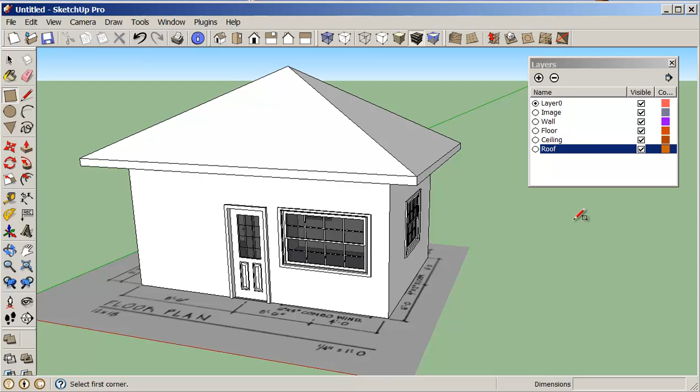This is the third class with bringing a JPEG image into SketchUp and creating your model. I'm going to turn off my image layer. We've actually finished that part of it. Now what I'm doing is I want to do a crown molding around the ceiling.

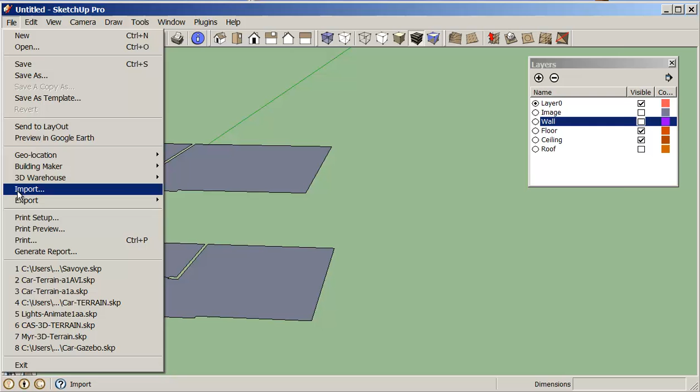So I'm going to do some ceiling effects here. I'm going to turn my roof off, and turn my walls off so that all I have left is my floor and my ceiling. So what I want to do here is import, file, import, and I can do crown molding.

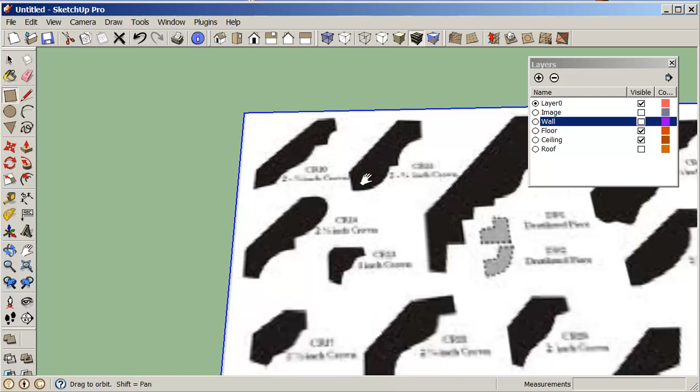I'm just going to bring in this crown molding and stick this here. Of course it's not going to be the right size. I'm not too concerned about it, I'll fix it up later. So let's say I pick this first one here and do a rectangle from here to here.

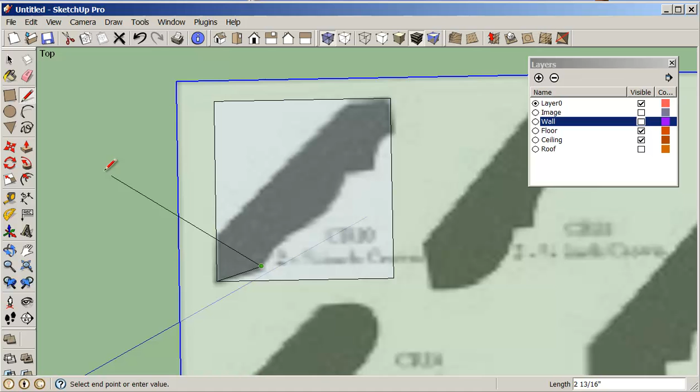Go into X-ray mode so I can see what I'm doing. I'm not going to worry about that part. Just going to draw a line from here to here, then an arc from here to here, and from here to here. Then a line. Oops, I missed that arc. Back to arc.

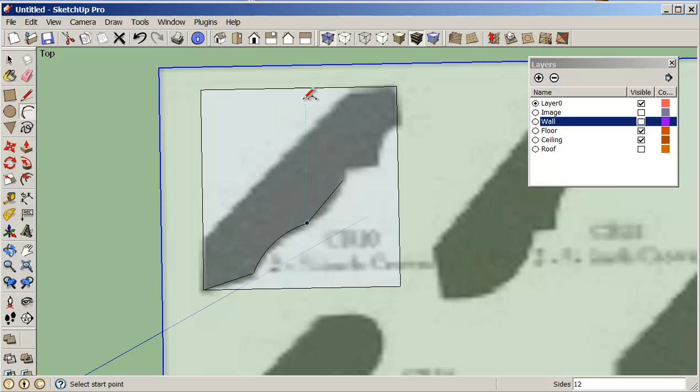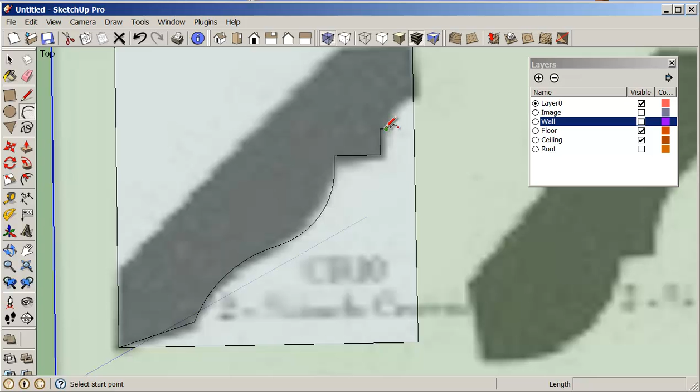I just draw a line from here to here to here to here and maybe to here. Add a little arc again from here to here. And then I'm just going to erase this part. So this is basically the crown molding profile I want to use.

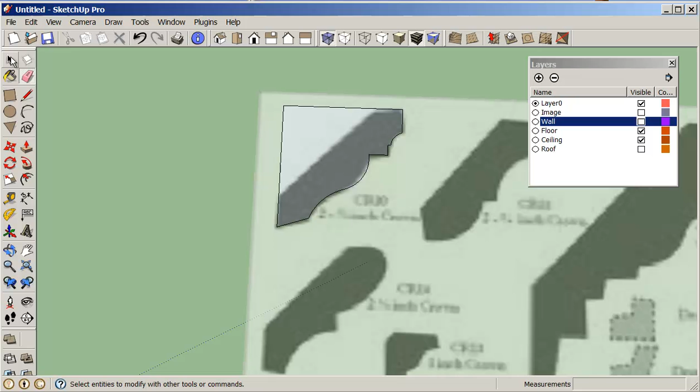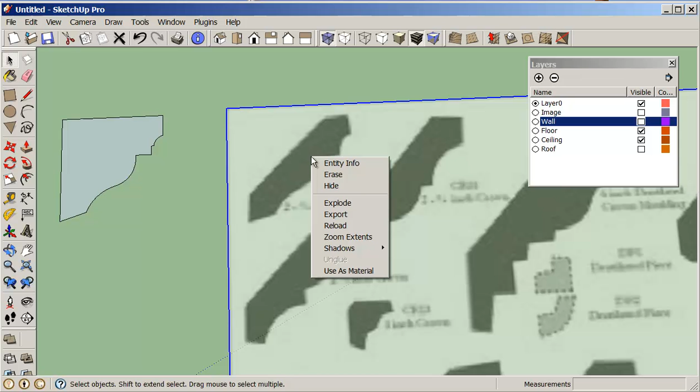I'm going to move this away from here. Now if I'm finished with this, I can just delete it. So I would like this to be approximately 4 to 6 inches. If I just measure that, it's 2 inches, so I'm going to scale it by 2. I'm just going to select it again, click on scale, and say 2 times.

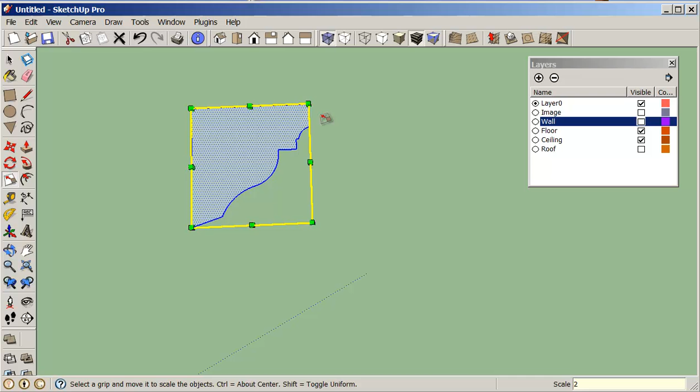That should give me something close enough for what I want to do. So it's 5 and a bit. That's a little big, but I'm fine, anything under 6 inches and over 4 inches is fine.

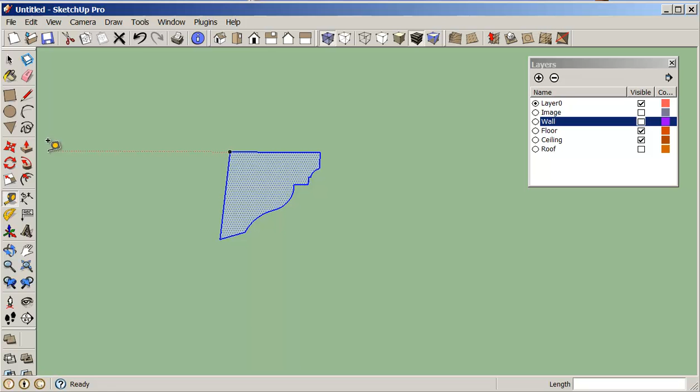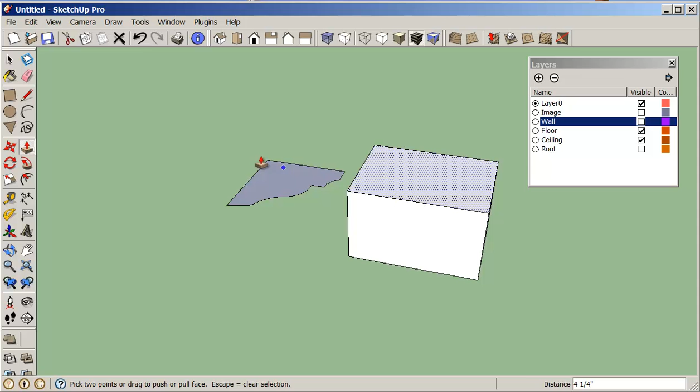The next problem is that if I want to put this on the roof, it's going to be laying flat, so I need to rotate it. The easiest way for me to rotate things is to make a rectangle, pull it up, undo, make sure I select this one, pull it up. This allows me to use this surface to rotate it. So I click here, click on rotate, and now I need to be in this direction.

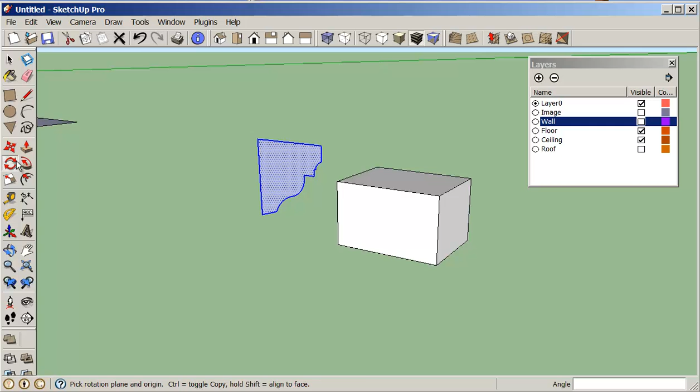If I'm here, it's flat, so it will only rotate this way. If I go here, hold down shift, I can pick this point, and now I can rotate it up to 90 degrees. I can type 90, or if it's already 90, I'm fine. So now I'm just going to move this from this point to, in this case, there's my midpoint. All right, so this is fine.

This is a group, so I probably need to explode this. And I probably don't want to have this line across here, so I'm just going to complete this line here and erase this part.

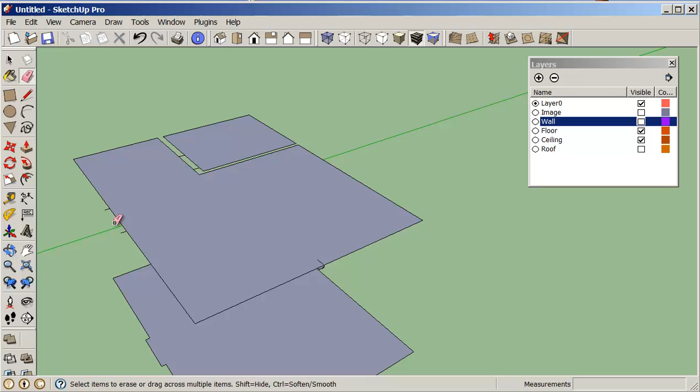So for this molding, we know that this has to be, I need a path. There's my path. Then I need to click on my tool and click onto this, and now that has created my profile for me. So that's actually quite cool.

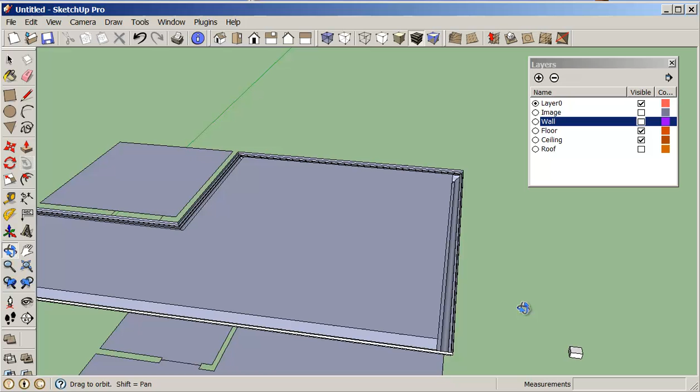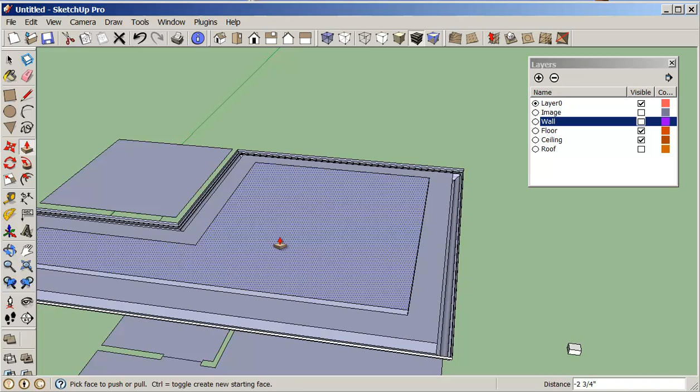I might want to do a little bit of feature on here, add a bit of a sunken ceiling, so from here I can click on offset, say offset 12 inches, and then I'm just going to push pull and say 4 inches. Now I'm in pretty good shape.

That looks really good. Oh, I don't like that line there, so I'll just erase that line and that line. It's going to make for a very nice setup, so I want to do this a little bit different.

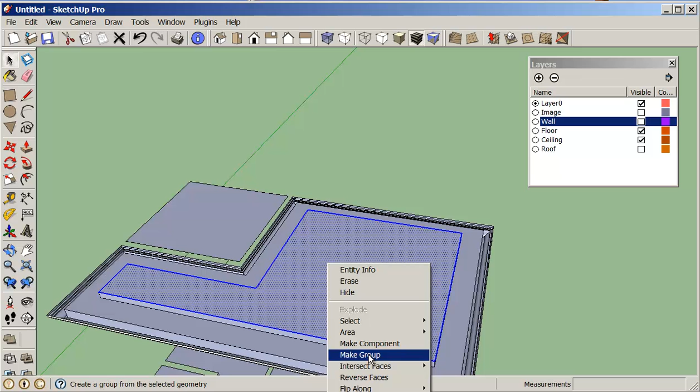I'm going to just double click on this and hide it. And I'm just going to double click on that and hide that. So again, I got some lines I don't want. Delete that, delete that.

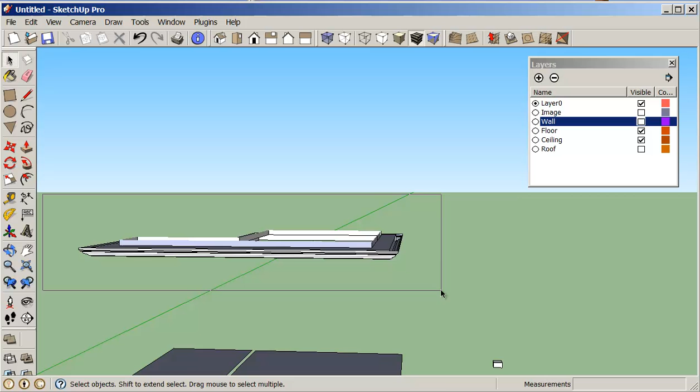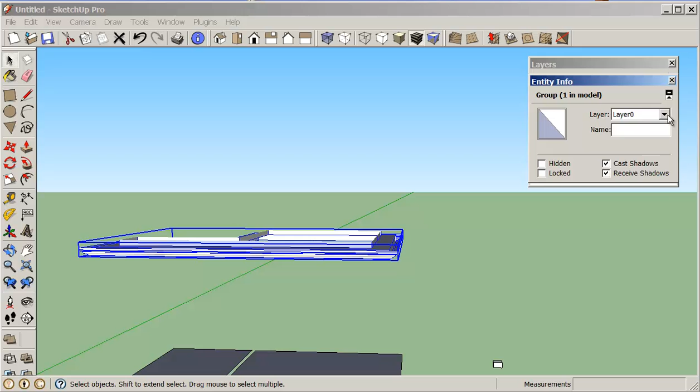So now what I'm going to do is make this into a group, and I'm just going to add a crown molding layer. Click that, right click, entity info, and put that on the crown molding layer. Okay, that's cool, so I can unhide my other stuff. And just double click on that, make that into a group again, and put those on the ceiling layer.

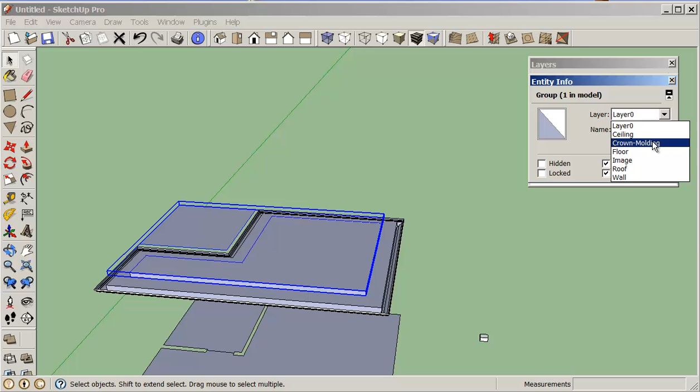The reason why I want to do this is if I want to do one material for here, one material for here, it's a little bit easier to do. Okay, so that's very good.

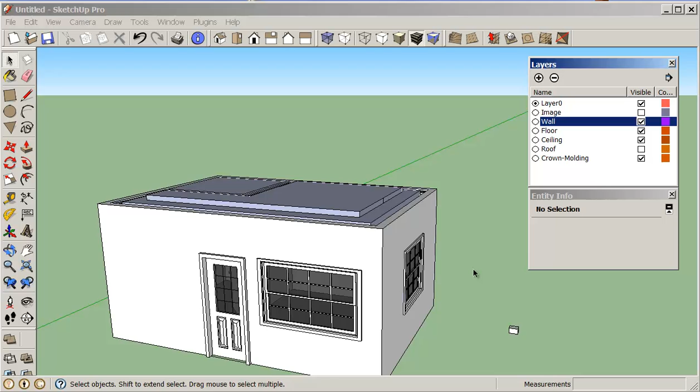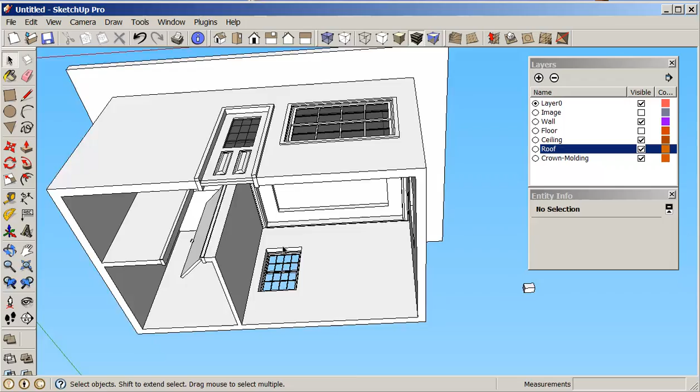I will, if I turn on my wall layer now, and turn off the floor layer, so now we can see inside. It's actually looking pretty good. So we need to do the same process, put on my roof. Now you can see why I didn't want my roof to be in that area, because you would see the roof in there if I did that. So that's looking pretty good.

So we need to do the same idea for the floorboards. So let's just stop this, and we'll make that another video. I'm just going to stop this.